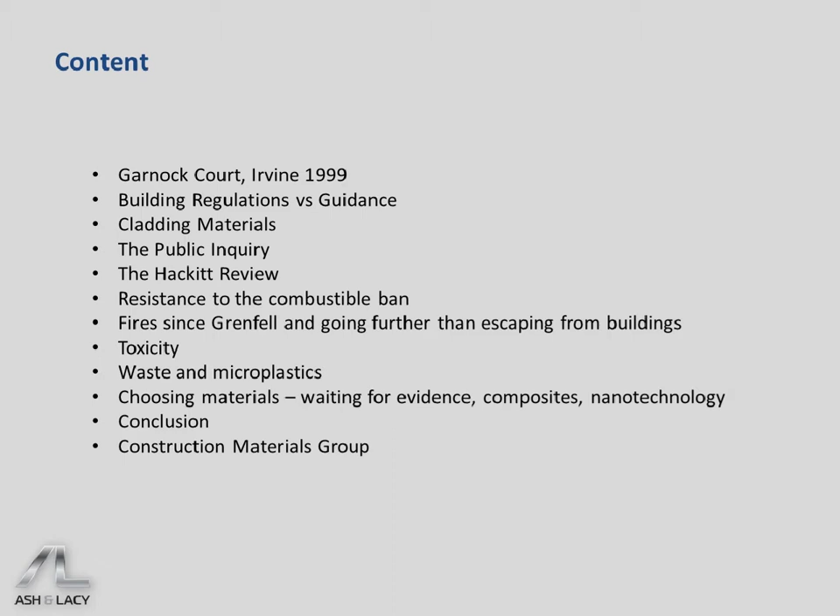Building regulations are also evidently not a quality standard that clients should believe will assure them of a building they can be proud of, nor should they be used by building professionals and engineers as a guide to the choice of an appropriate material during construction. What we're going to look at is how the construction process has been affected by developments following Grenfell Tower. And rather than look just at the combustibility of materials and fire regulations, we're going to look at other issues relating to construction materials that the regulation changes might actually impact.

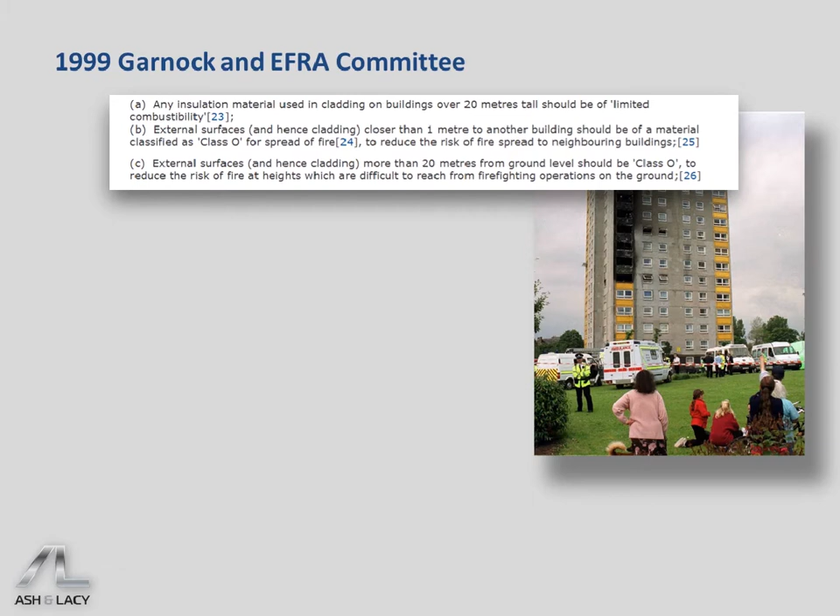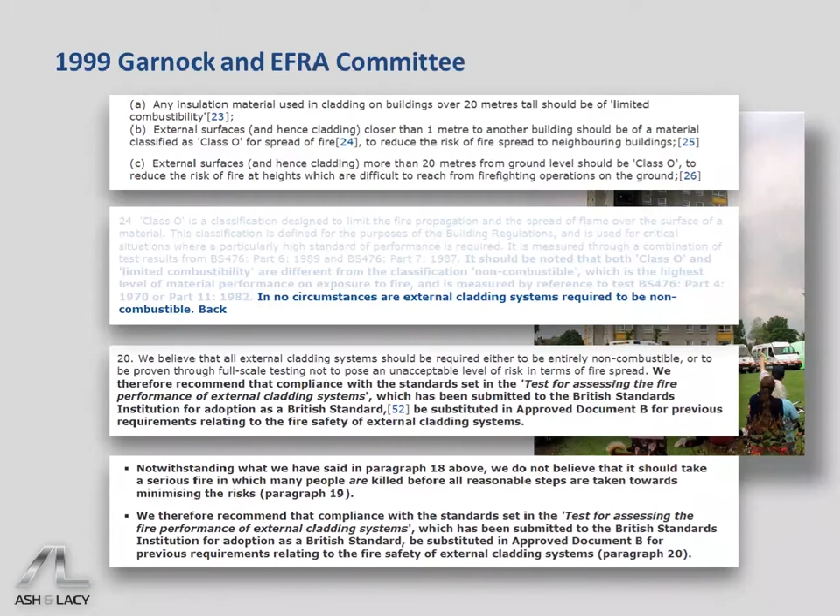20 years ago, there was a fire in a block of flats in Irvine, Scotland. The MP at the time, Brian Donohoe, recognised that this fire could have been much worse. Sadly, one person died, but had the fire happened during the night when everybody had been asleep, the death toll could have been much higher. So a committee was formed to look at the cladding on this building and the external fire spread, and it made a number of recommendations that sadly were an indication of the failures that were to follow over the next 20 years. The words that seemed to strike the most from what was said at the time were that it shouldn't take a serious fire in which many people are killed before all reasonable steps are taken towards minimising the risks.

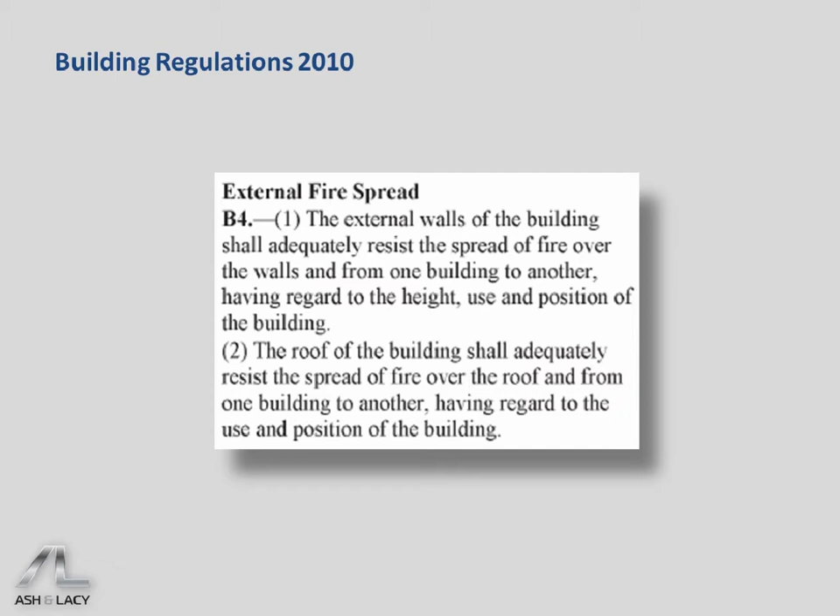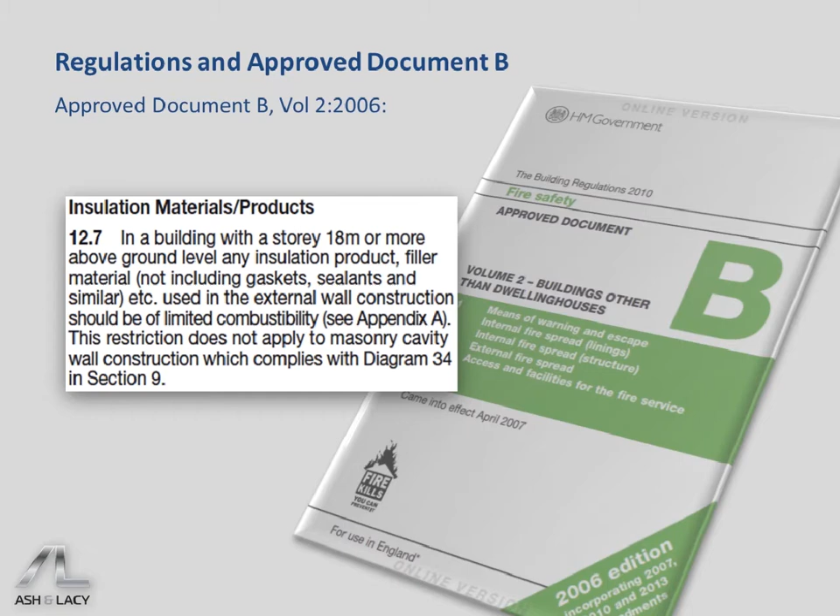It's clear to understand that building regulations themselves are actually very simple. All they dictate really is that you shouldn't have a building where the external spread of fire isn't sufficiently restricted. However, doing so is quite a difficult process. So we have a suite of approved documents, approved by the Ministry, which gives detailed guidance on how to actually achieve the restriction of external spread of fire. The particularly contentious clause in Approved Document B, which relates to fire safety, is clause 12.7, and this has been argued about much since the Grenfell tragedy. Just to recap on some of the terminology relating to cladding, the cladding system comprises several key elements.

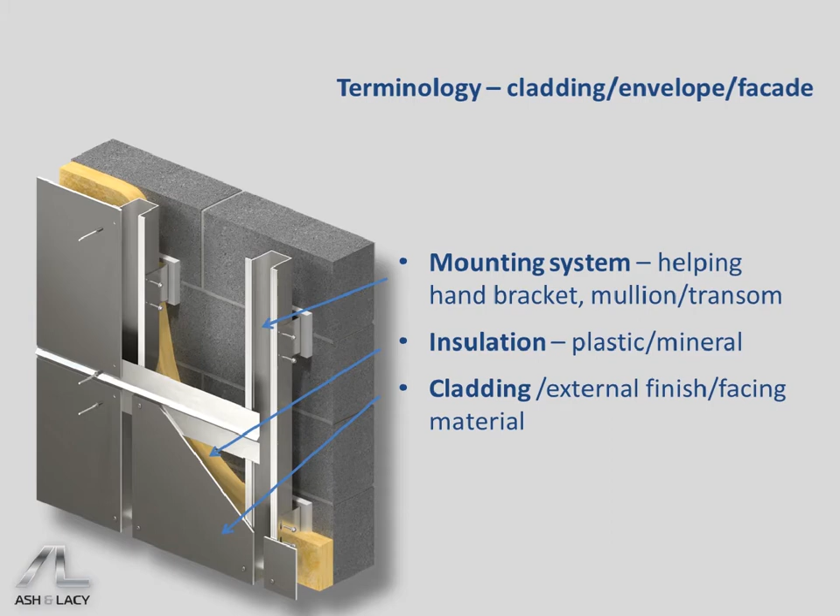We have a mounting system, usually made of aluminium brackets and extrusions, on which the cladding rests. We have the insulation which sits in the cavity. The cavity provides ventilation to prevent moisture from damaging the building. Then we have the cladding, the external surface itself, sitting on the front of the mounting system. This can be a wide variety of materials, from steel, composite materials, solid aluminium, brick slips, and so on.

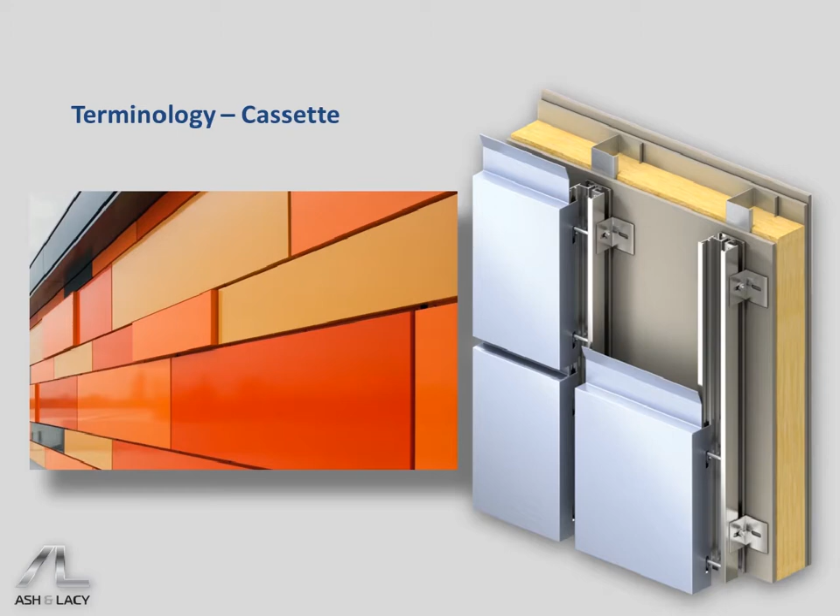This is a face-fixed system. It has a flat sheet with exposed rivets and connections and achieves this kind of finish. But most modern buildings and architects choose to use a cassette system, which achieves a wider variety of aesthetic finishes, and is largely what we see today. There's no question these are undoubtedly top-of-the-range, expensive systems. This is not a cheap way to refurbish or design a building.

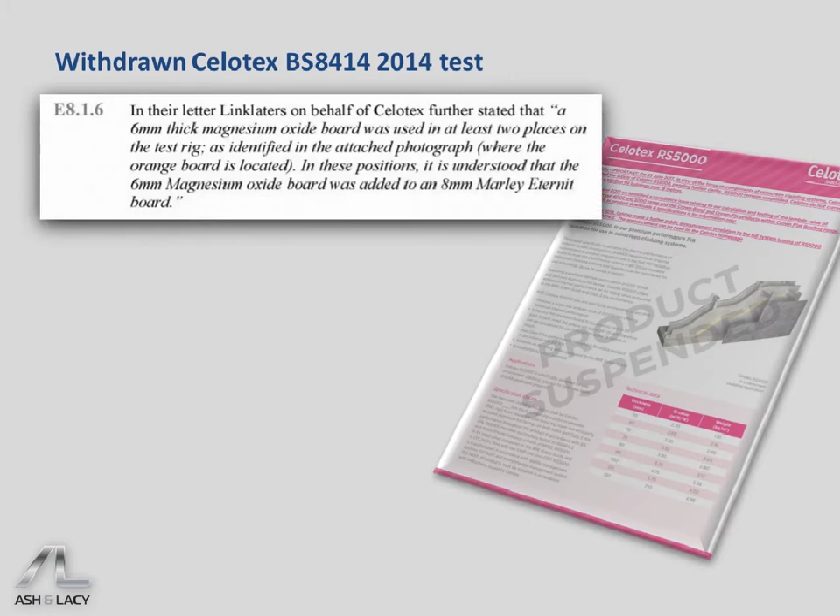After the Grenfell tragedy, Dr. Barbara Lane from Arup was appointed as the fire engineer to the inquiry. One of the key questions she was looking to answer was about the cladding itself, not the insulation, but the cladding in line with the guidance provided by central government. Her report has already highlighted a vast number of failings in the whole process that led to the refurbishment, including building control, the product certifiers, the testing process that leads to certification, and so on.

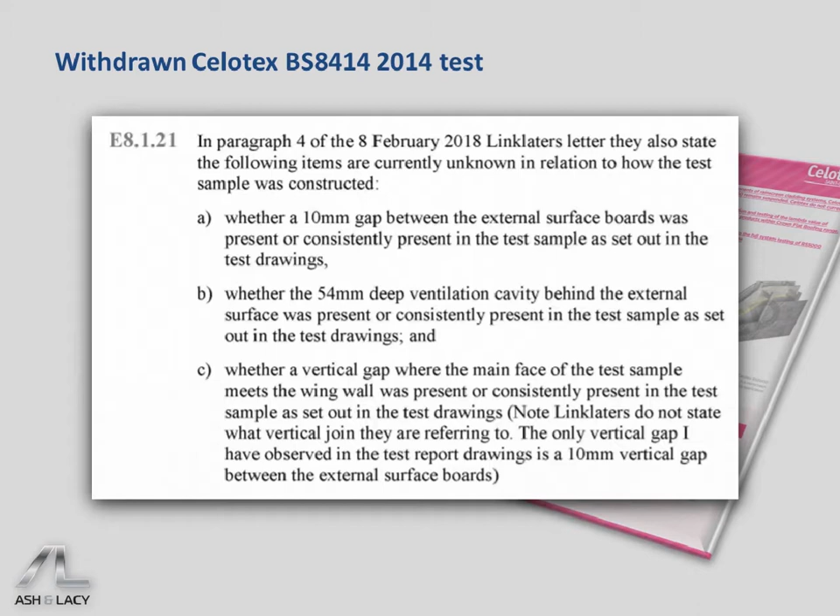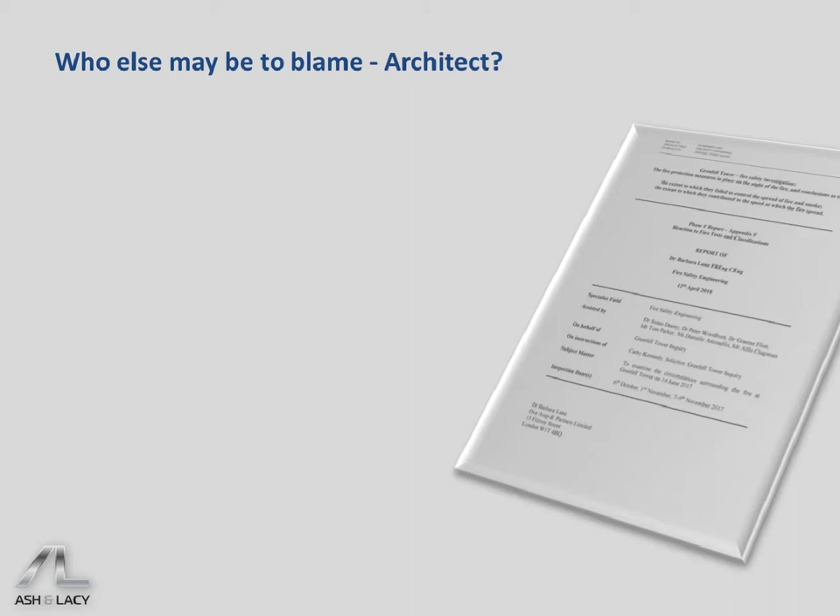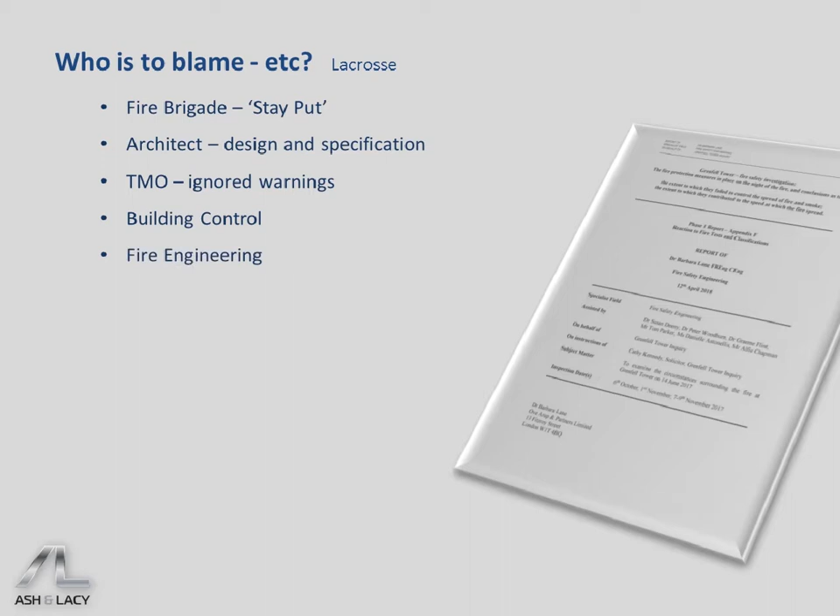Soon after the disaster, it was clear that the certification for many of the products wasn't adequate, and some were removed from the market. But the whole process isn't just limited to the cladding itself. The disaster exposed a wide range of issues with the construction industry and how it's regulated and controlled. The design itself was severely flawed, but there are also many other parties who have received a lot of attention and criticism. Every single one of these organisations involved in the refurbishment have questions to answer about the role they played.

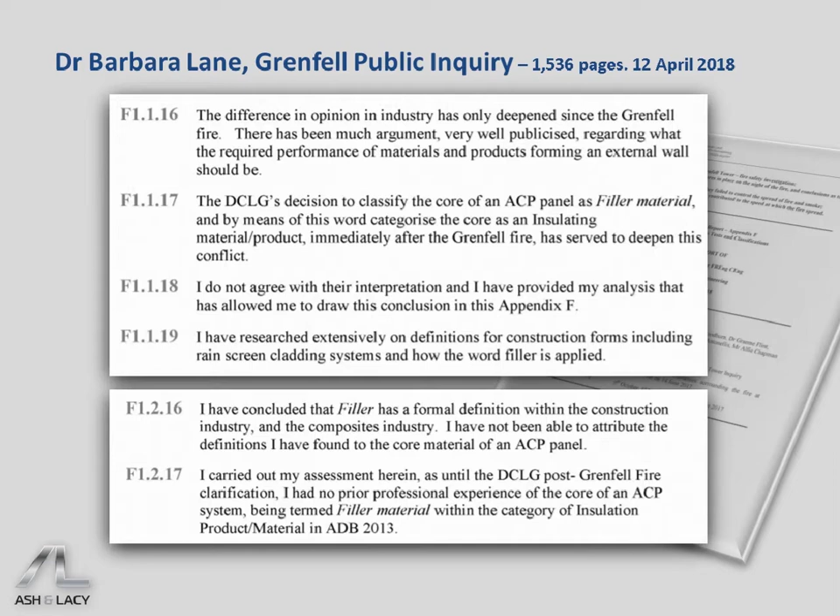Going back to one of the key items of whether the cladding was compliant or not, it's Barbara Lane's opinion that Class O ACM as used on Grenfell could have been compliant with approved document B, section 12. That is absolutely critical to understanding what went wrong in Grenfell Tower and how the regulation process could be changed to suit moving forward.

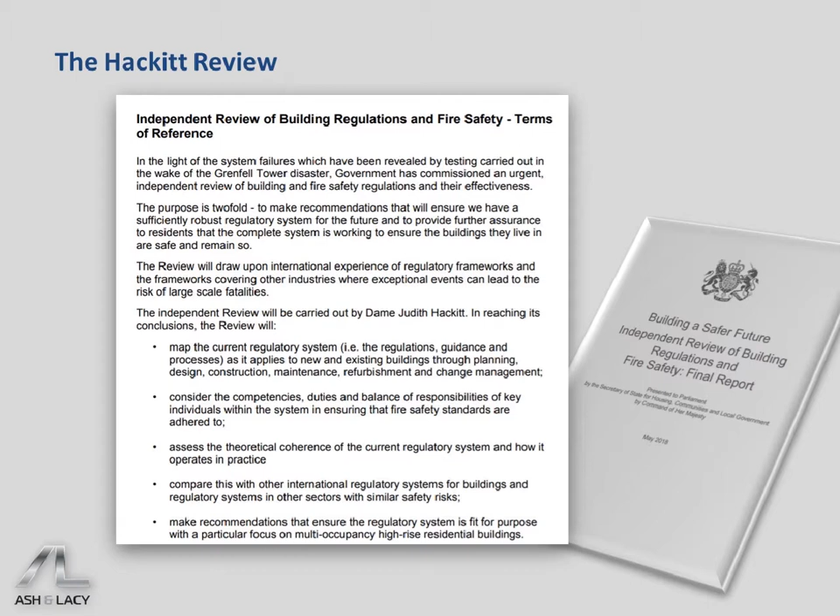She was asked to look basically at the system surrounding building regulations. It was quite apparent when her review report was released that she'd started from the premise that the cladding on Grenfell Tower was already banned by the guidance and the regulations. The regulations clearly should never have allowed a material like that on the building, but she assumed that the guidance in approved document B actually insisted the cladding should have been of limited combustibility. She had a very hard time on the day the report was released, mainly because she ignored the elephant in the room, which is that you should simply ban the types of materials that were there.

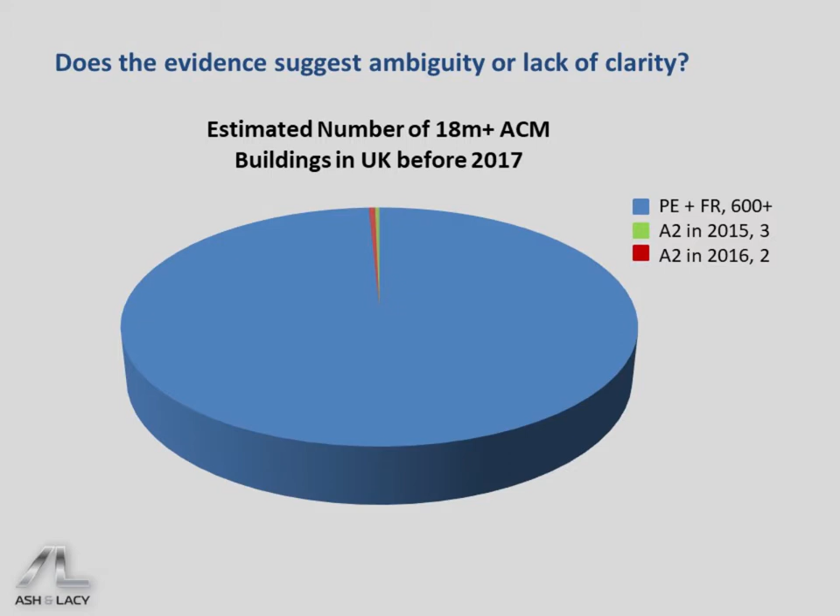If we move forward to 2015-2016, we can see that we have about 5 buildings now, so approximately 1% of buildings now had limited combustibility ACM cladding. It was very clear that the industry, all the professionals, the building control, fire engineers, specifiers, architects and designers, all understood approved document B to mean that you needed Class O or Class B cladding on a building over 18 metres. Among the highlights of the Hackitt Review were some good proposals.

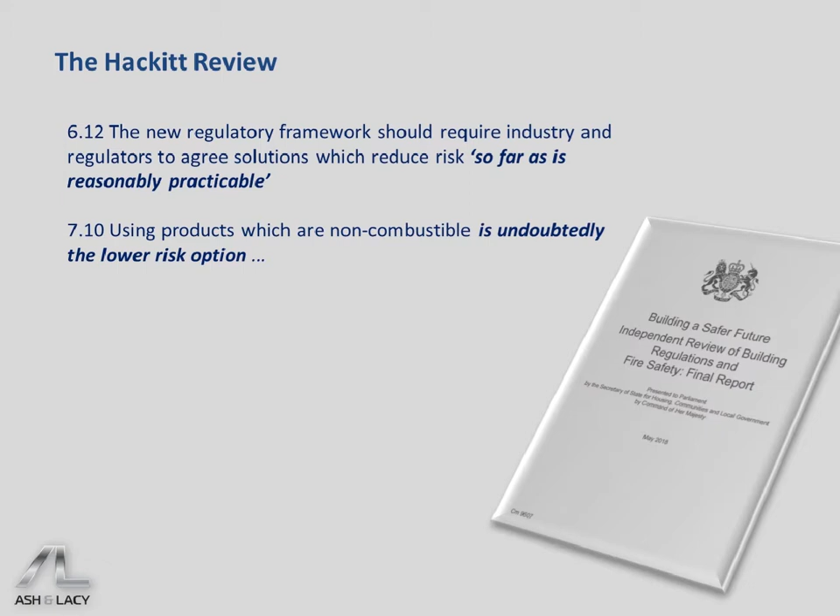The regulatory framework should require industry and regulators to agree solutions so far as is reasonably practicable. Now, the part of that clause which worries me is 'industry and regulators to agree solutions', and we'll come back to that. She also said that using products which are non-combustible is undoubtedly the lower risk option. However, what she failed to do was combine 6.12 and 7.10 to come to the conclusion that actually one of her recommendations should be to remove combustible materials.

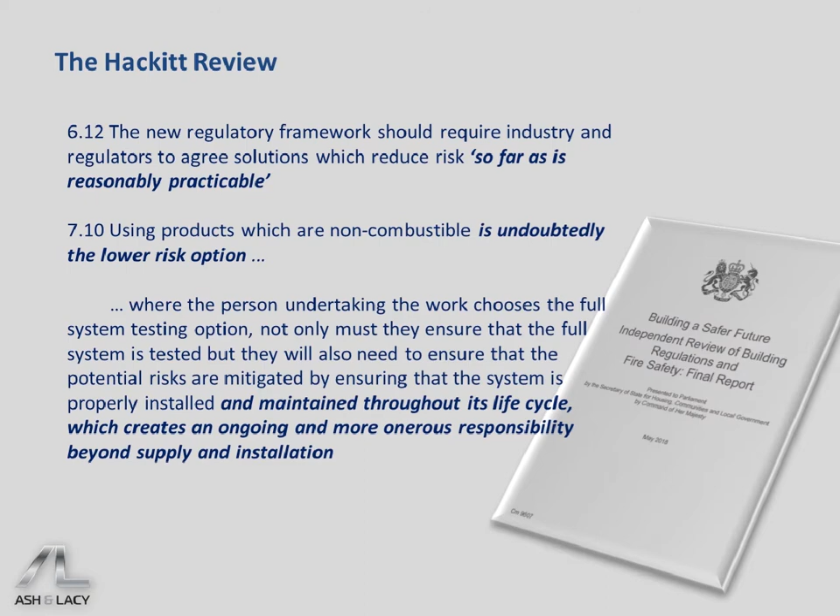She also made the valid point that if you're specifying combustible materials on the basis of their tested performance, the obligations on the building owner or duty holder are quite onerous, and that you have to maintain the building to the standard of the test it went through for its entire life.

So Dame Judith now travels the world talking about her review, and she underlines the fact that she was only asked to review the system itself. Who was going to look at the regulations? We just don't know. So many of the problems in terms of implementing a combustible ban, there have been a number of reasons put forward.

As you've heard Dominic Raab say, we don't want just a tick box exercise which gives the false impression that we've solved this problem just by banning combustible materials. But there have been many arguments that have led to procrastination in getting an effective combustible ban implemented.

One of the messages we repeatedly hear is that we should leave it to building science to determine what materials are used in construction. However, the people at the top of the fire engineering field quite readily point out that it's very difficult to predict how a building is going to burn given the material properties within a system.

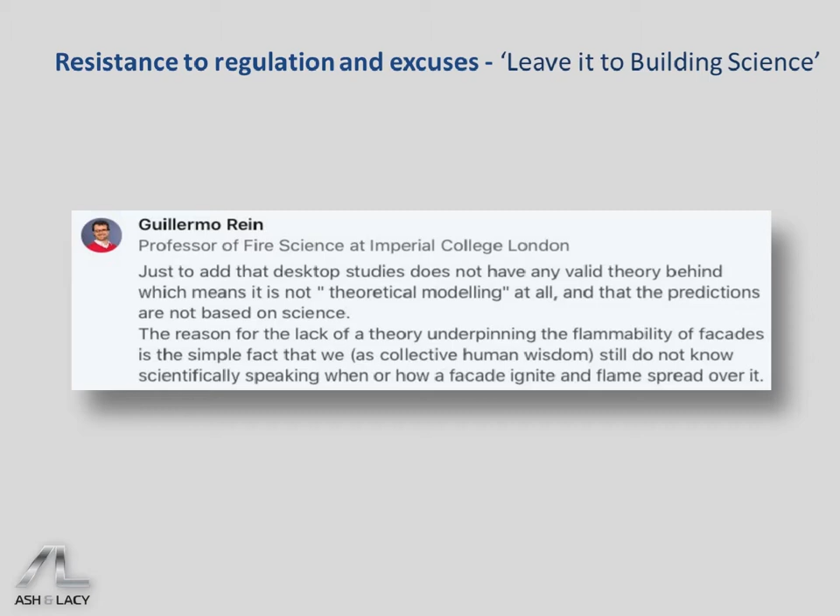The analogy I use is that predicting how a system is going to perform based on the material properties is like predicting what a musical instrument is going to sound like based on the materials that you've constructed it out of. Another argument we hear a lot is that we should sit back and look at industries that do actually get it right.

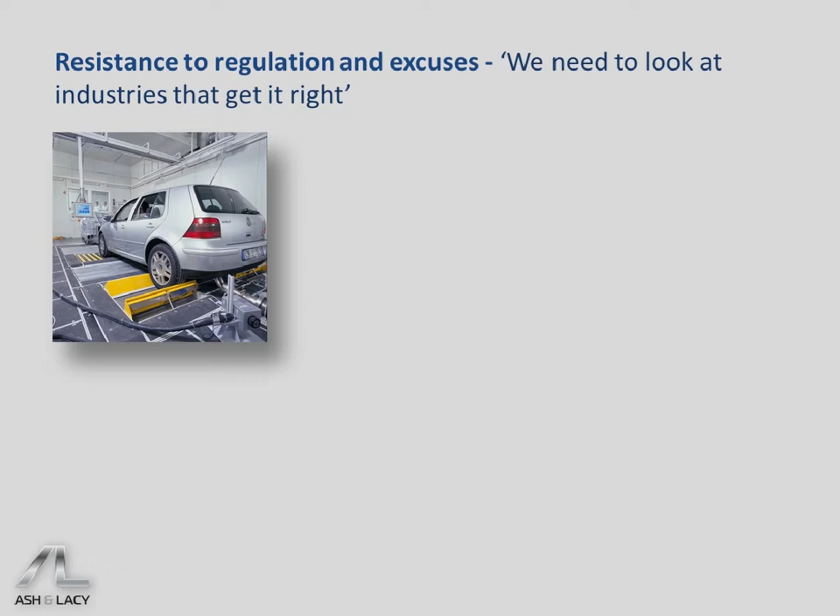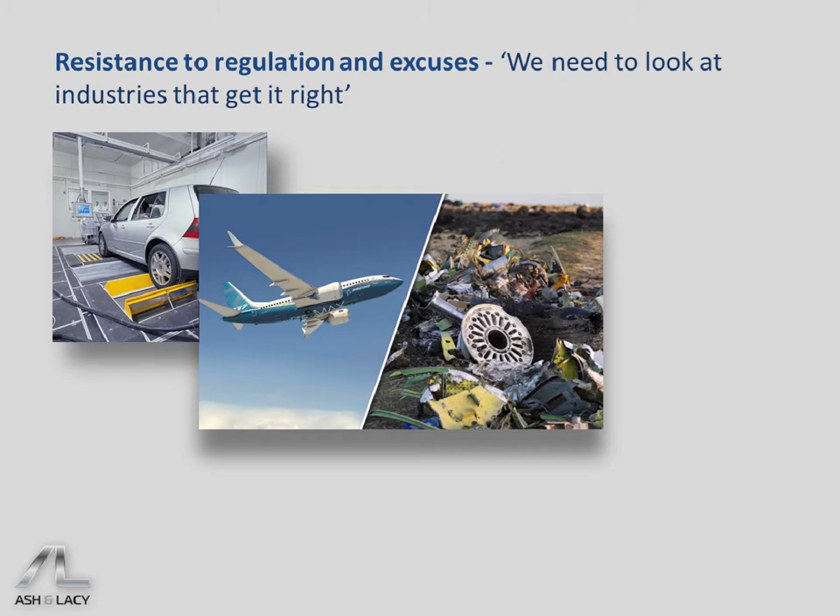I can use the same image, however, in terms of innovation, to show that the automotive industry is also subject to corruption, and the diesel emission scandal is evidence of that. The aerospace industry also has its own problems, and the more information that emerges about the Boeing 737 MAX 8 problems, the more you see regulatory problems there as well.

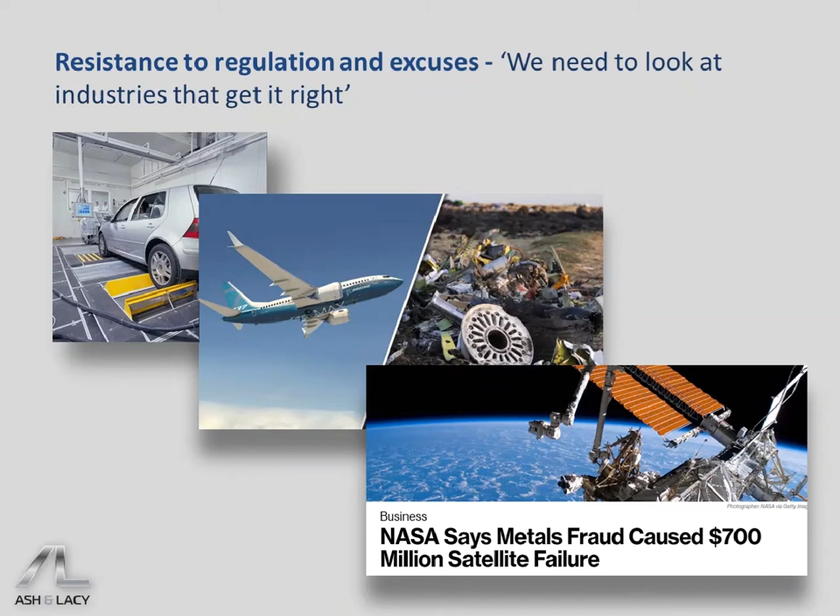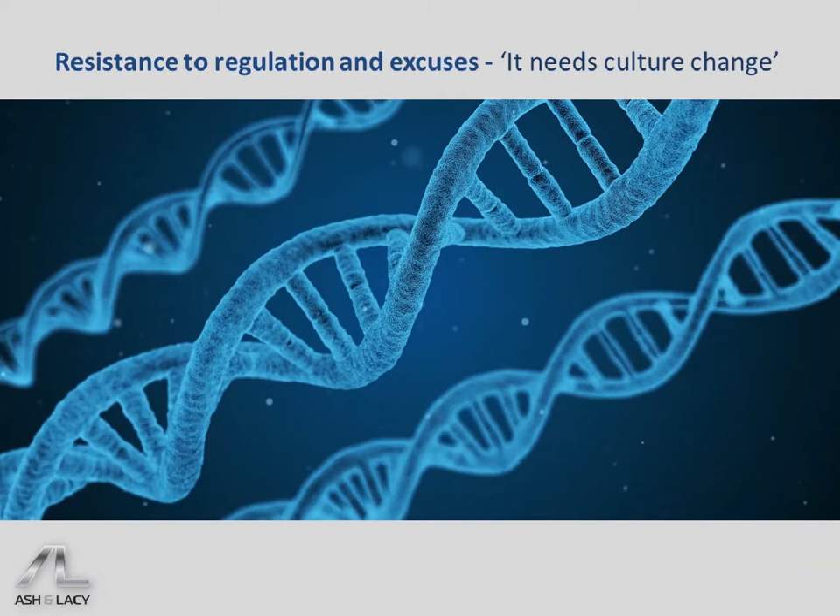Even NASA, in putting satellites into space, has problems with product certification and testing. The common theme throughout this, to me, is a lack of independent regulatory control that is totally immune from the pressures of commercial organizations. And the final one is that everything we do needs culture change and an improvement in competency. Well, those are vacuous words that you could pretty much apply to any problem around the planet today.

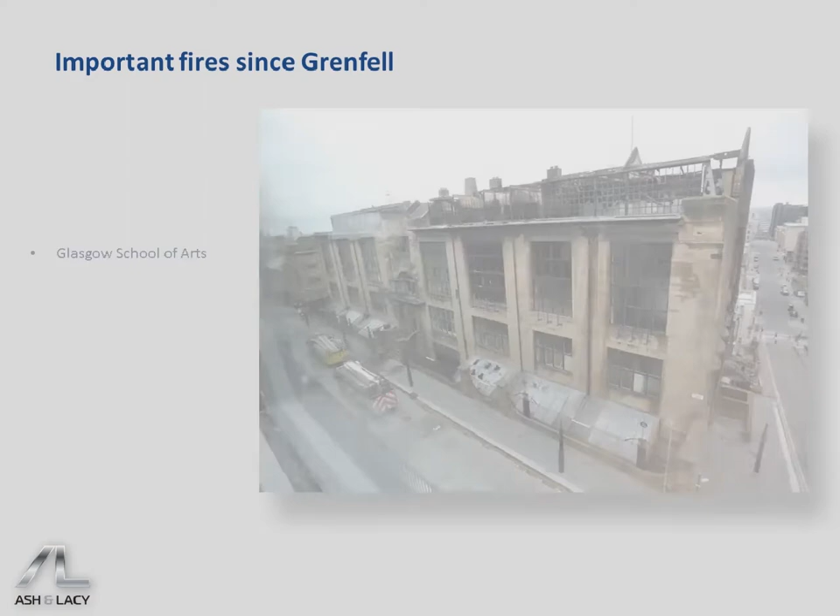What we've also learned is that building regulations, and fire regulations in particular, only look to protect life. They do not look to protect assets. But we've had some significant fires. We've lost the Glasgow School of Arts. We've lost a big part of Notre Dame. Many people lost their livelihoods and possessions in a self-storage fire in Croydon on New Year's Eve.

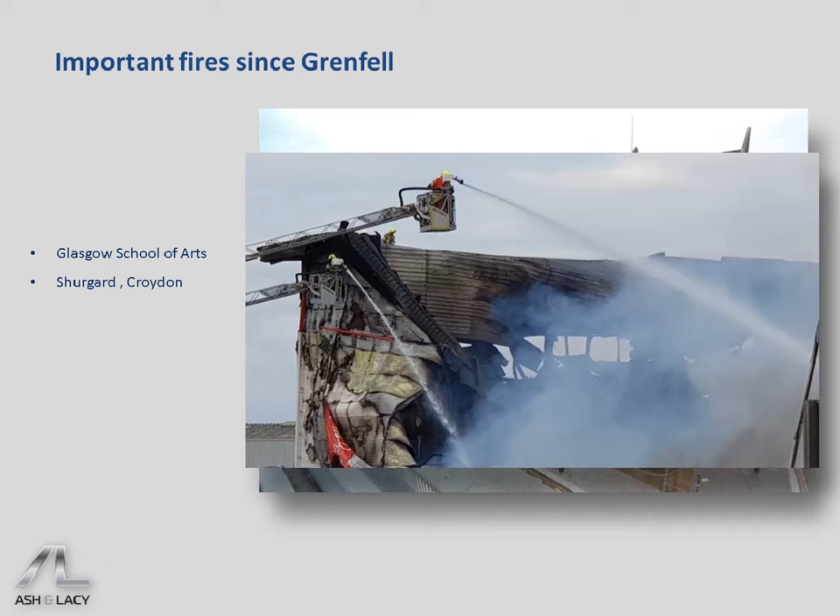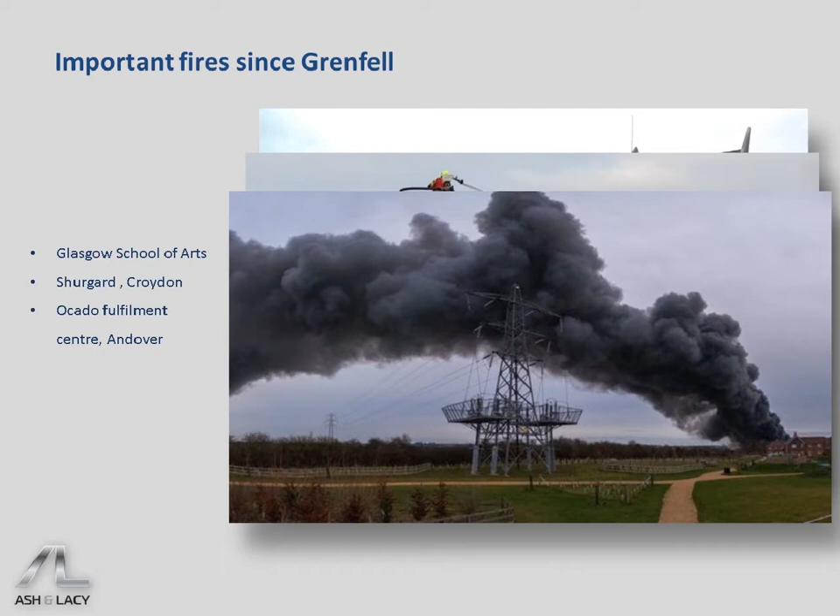We've had a spectacular fire at a building that won awards for its fire safety, at the Ocado Fulfillment Centre, which caused massive disruption to businesses, and local houses were evacuated and so on. So we have to question whether fire regulation should go far beyond actually just being able to get out of a building alive. Toxicity is an issue that is very contentious.

Before Grenfell, there was a report commissioned by the EU that the BRE carried out, looking at whether we should regulate the toxicity of building materials. However, the report itself highlights some of the inadequacies in our regulatory process and the lack of leadership that we have.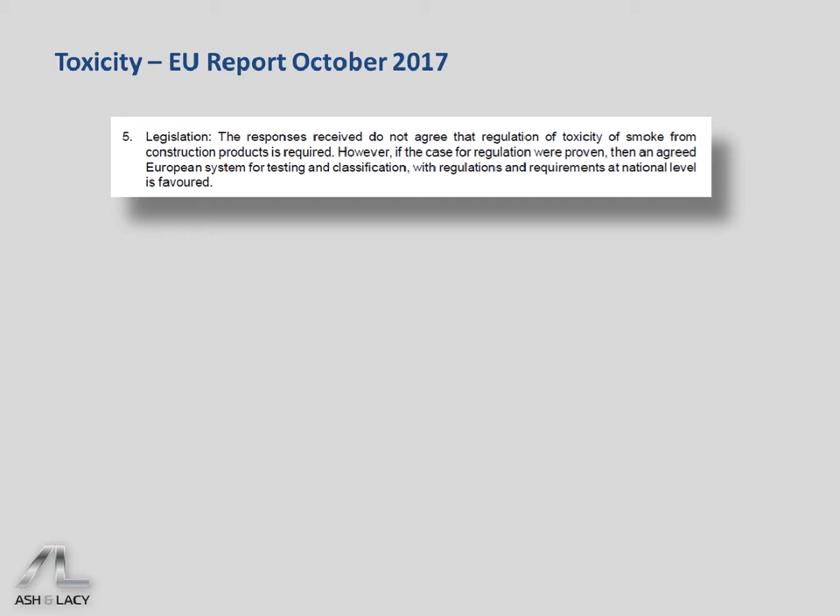Basically, the report showed that the responses didn't agree that toxicity should be regulated. That's not surprising given that many of the responses came from plastics manufacturers and their lobbying organisations. One of the quotes from the report gave a reason to not introduce toxicity regulation, in that it could actually remove some products from the market.

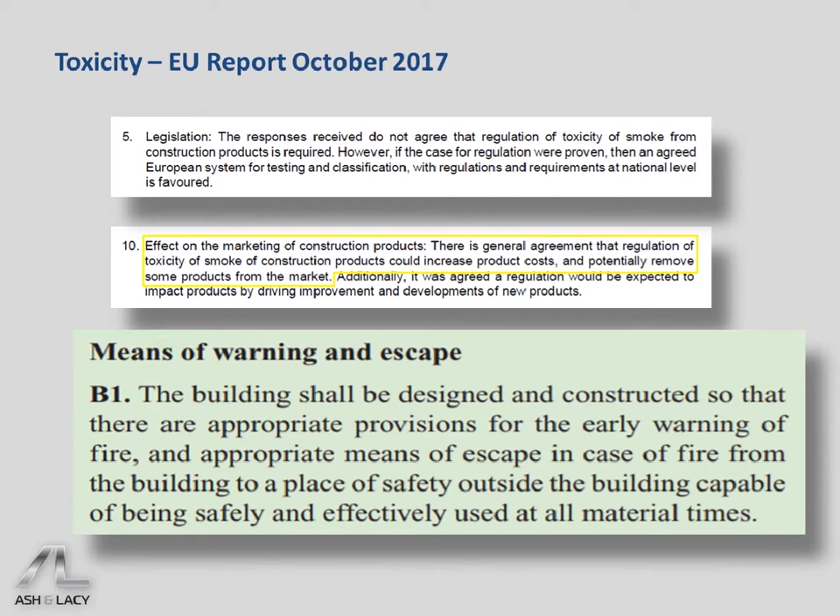However, the report did actually state that in areas where toxic smoke could lead to compromising of escape routes, this should be looked at. And it's possible to argue that building regulations do regulate toxicity if you interpret the means of escape requirements slightly differently. Means of escape requirements being clear and usable at all times is usually interpreted as being clear from physical obstacles. But as you'll see from the next video, taken from the night of Grenfell Tower, smoke itself could be construed as preventing the use of an escape route.

We do have increasing evidence, and there is a lot of history that shows that governments, in the face of credible evidence, do change regulations. However, this can take a long time to manifest itself.

There is more evidence emerging, particularly from firefighters, that toxicity can have very damaging effects on your long-term health. Some of this data is accumulated over many, many years.

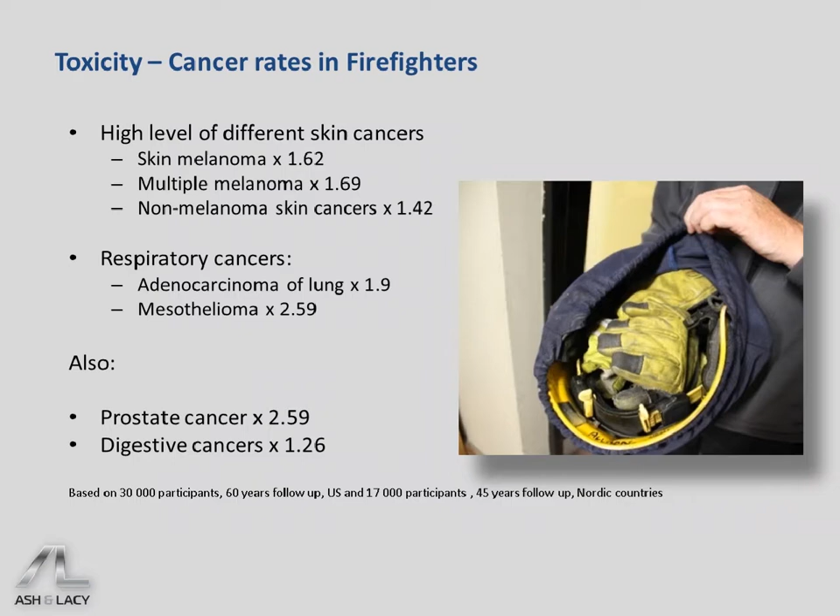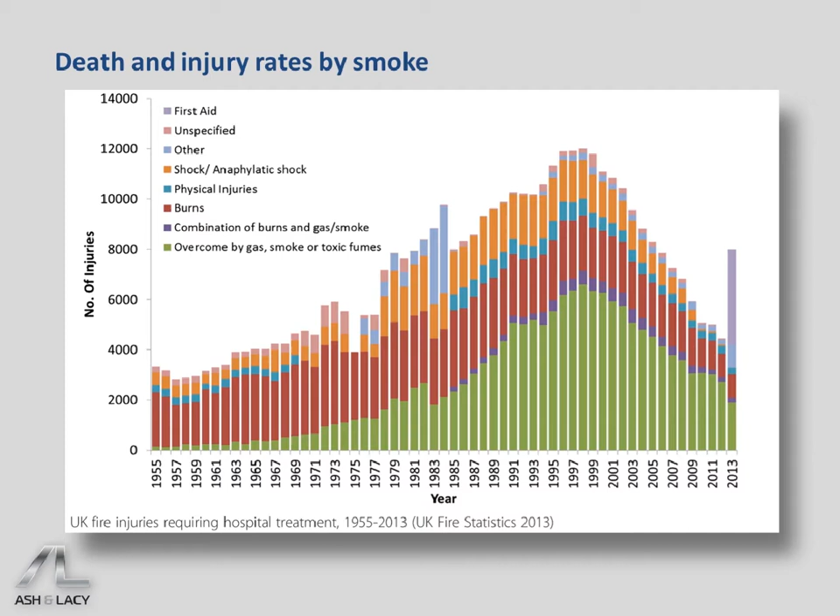What we've seen, though, is the nature of toxicity seems to be changing. If you look at this graph, up until the 1960s and 1970s, the number of people that died from the effects of fire was largely due to burns. But during the 70s and 80s, the proportion of people that died actually from the effects of gas and smoke rises considerably and plateaus into the late 90s. So the nature of the materials that people are dying from the burning of has changed over the last 50, 60 years, and cladding systems represent a problem in themselves.

Combustible materials burn differently, whether they're in ventilated or unventilated conditions. On the left-hand column, the flame retardants that are added are unbonded, so it doesn't really matter how the material burns. You can see from the chemical symbols that these gases, when combined with moisture, form acids, which is why we often hear of people reporting irritants in their eyes when hydrogen chloride mixes with the water on your lungs and in your eyes, it's going to sting.

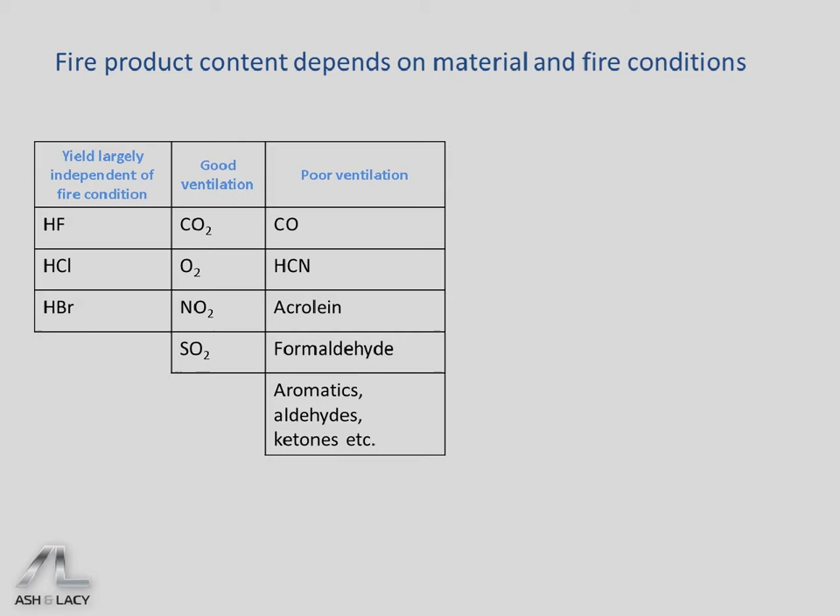In the right-hand column, with a poorly ventilated fire, as you would find in a rain screen situation, incomplete combustion leads to complex molecules which have potentially damaging long-term health effects. Carbon monoxide and hydrogen cyanide are easily got rid of by the body. However, they are incapacitating in the early stages of fire.

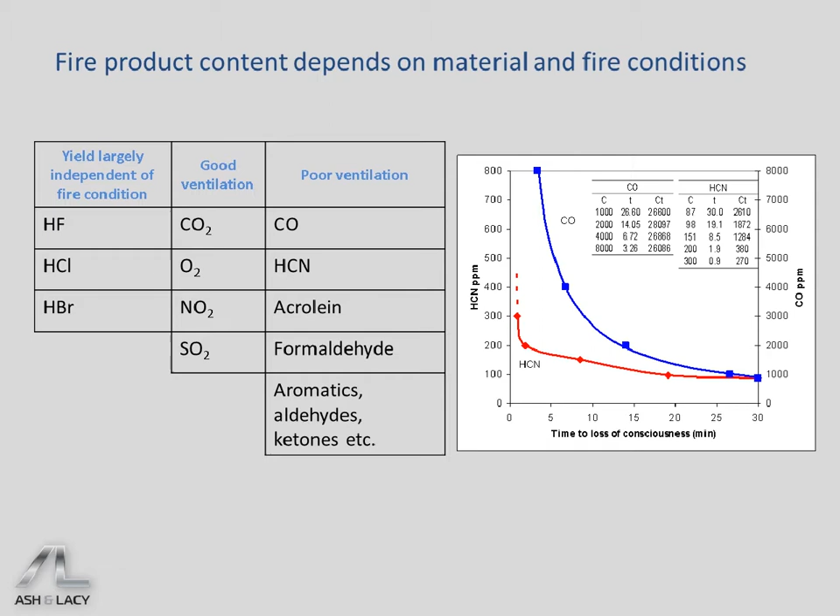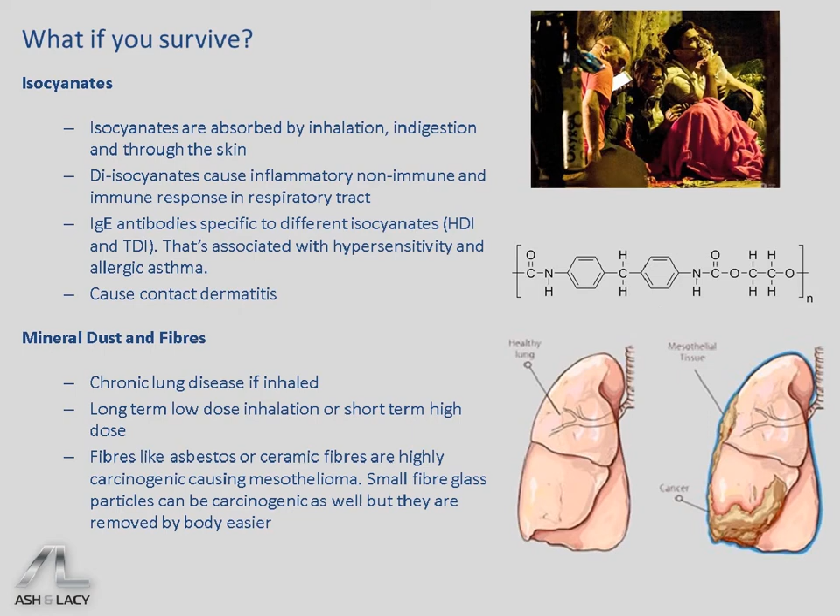However, if you've survived the fire, your problems might not be over if you've been exposed to a significant level of smoke inhalation. More and more evidence is showing us that long-term health problems can affect the people who've survived fires such as the Grenfell Tower, and this evidence is likely to increase over time.

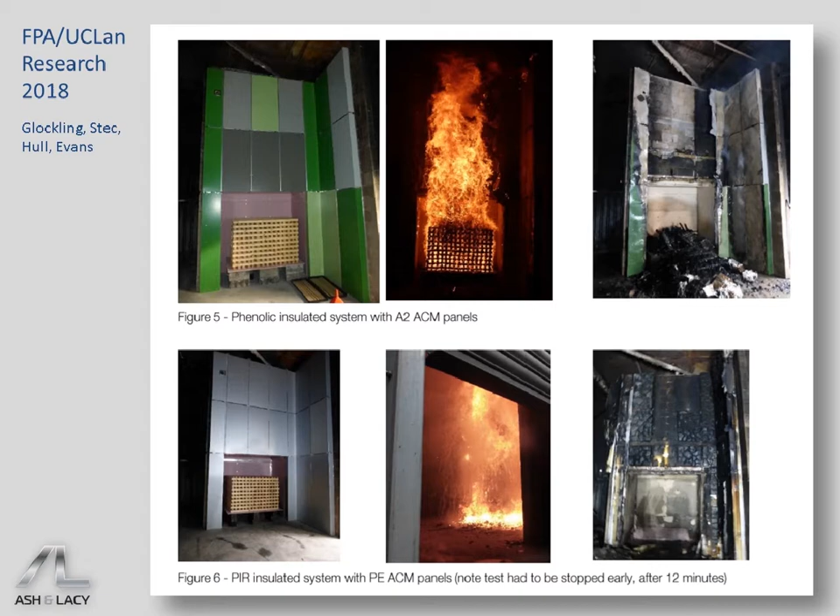A number of combinations of materials, non-combustible cladding, combustible and non-combustible insulation, were analysed, and part of the test included analysing the gases that went into the vent even before the fire actually reached the vent itself.

Interpreting these results and extrapolating them as if these gases had filled a 50-cubic-metre room, such as a kitchen or bathroom that the people in the flat above were protecting themselves in, shows that even with non-combustible cladding, the combustible insulation systems had lethal doses within half an hour, even regardless of the fire having spread to the flat above.

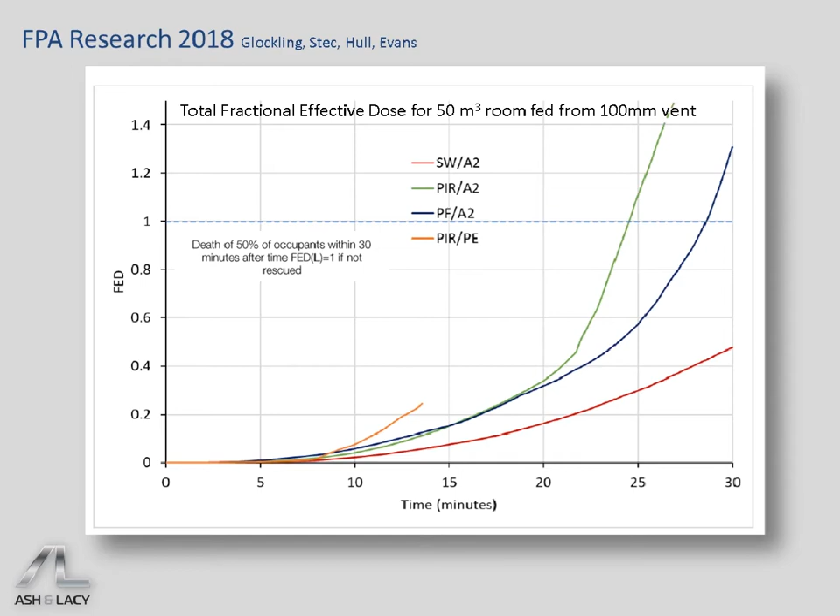This calls into question two key things. One is the stay put policy, and the other is whether toxicity should also be added to the BS 8414 test, which looks at the fire safety performance of systems based solely on their external fire spread.

Looking further afield than just fire protection, the combustible ban might have implications that weren't necessarily intended, hopefully beneficial. We're bombarded today with information about plastic pollution, bottles floating in the ocean, and microplastics being found everywhere. It's not just pollution that we see that is necessarily the problem.

Much of the combustible material being stripped off buildings that are considered dangerous today in the building safety program will be headed to landfill. There are no viable recycling schemes for thermoset plastics at the moment, and much of this material is useless in any other form.

We're also seeing that around the Grenfell fire, many of the flats, the curtains, the carpets and so on are contaminated with the byproducts of the fire. The polyurethane foam market in 2018 was estimated at $50 billion, so these are very large numbers and it is growing at a considerable rate.

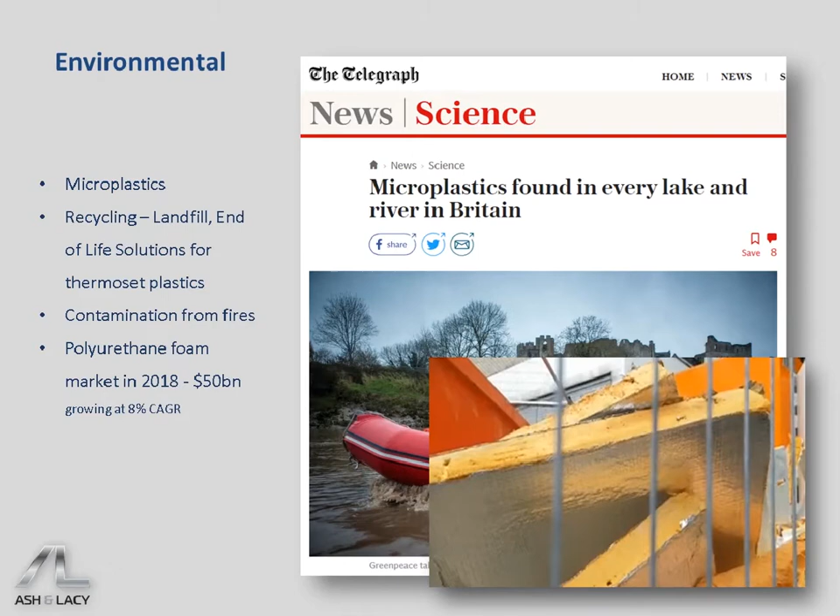The video you're about to see shows nothing to do with the combustibility of these products. Here we have 100 millimeters of phenolic foam insulation, and all we're going to do is cut it.

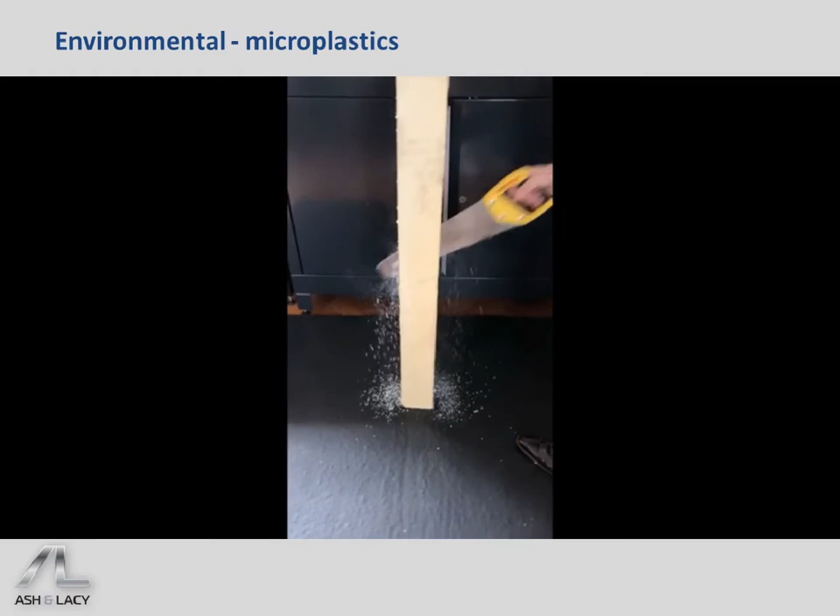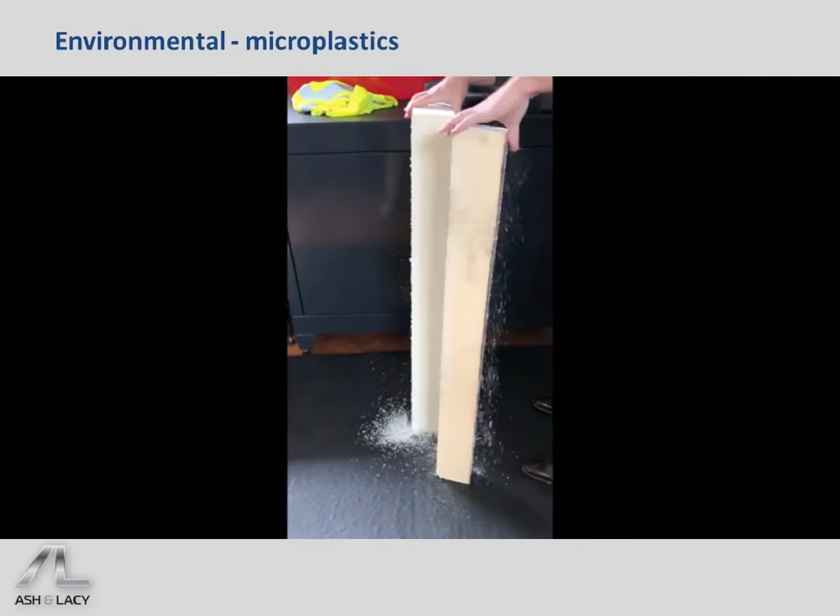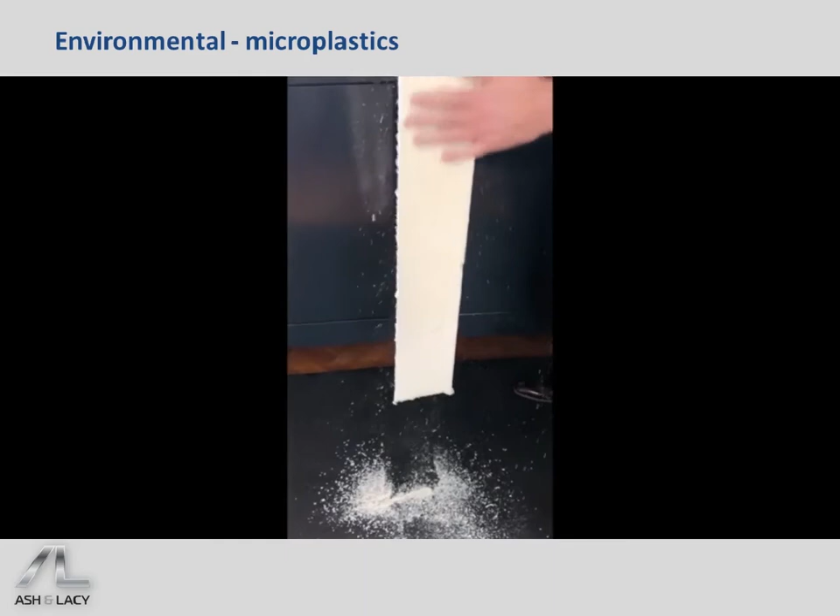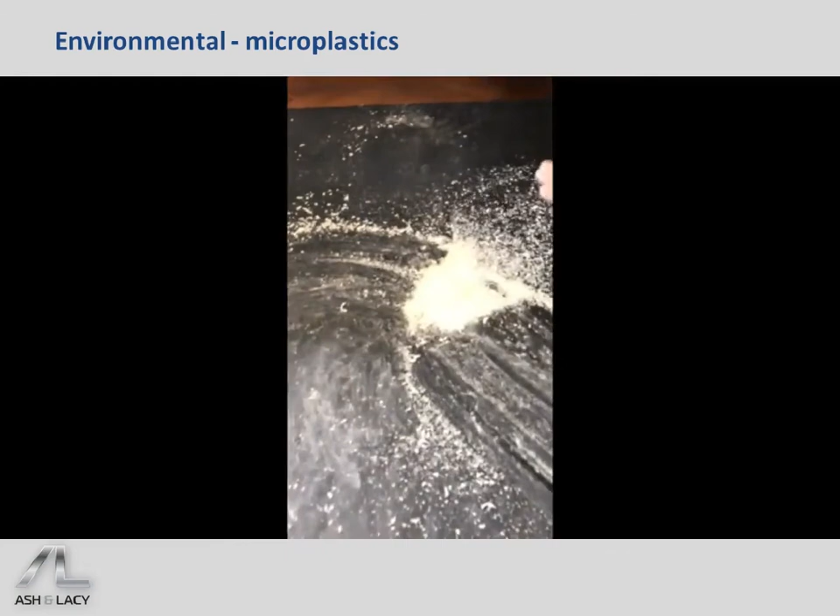As you can see, it leaves quite a rough finish to the product, and all this is basically going to come off at some point. Quite smelly too. If you zoom in, what you've got from just 1 metre is this.

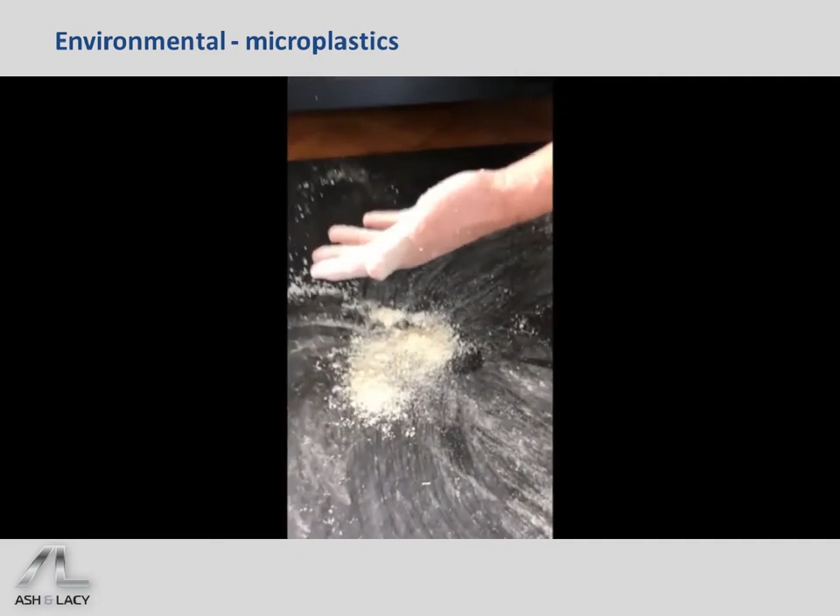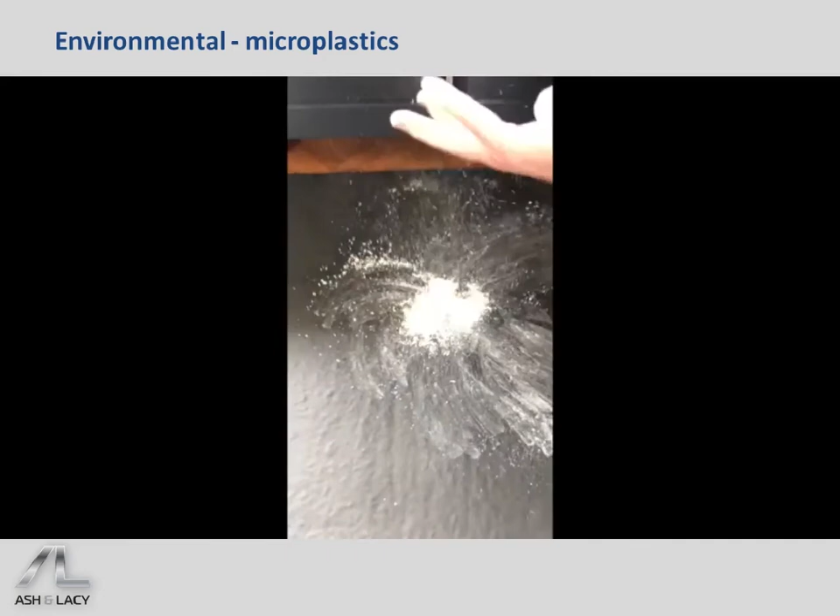You can see the dust flying around. You've got basically a powdery mix of polyurethane based thermoset plastic with some kind of flame retardant mixed in with it. Now obviously on a building site, what's going to happen to that is it's just going to fly away out into the air, into the water streams, into your fish, into your stomachs, into your areas of natural beauty, and so on.

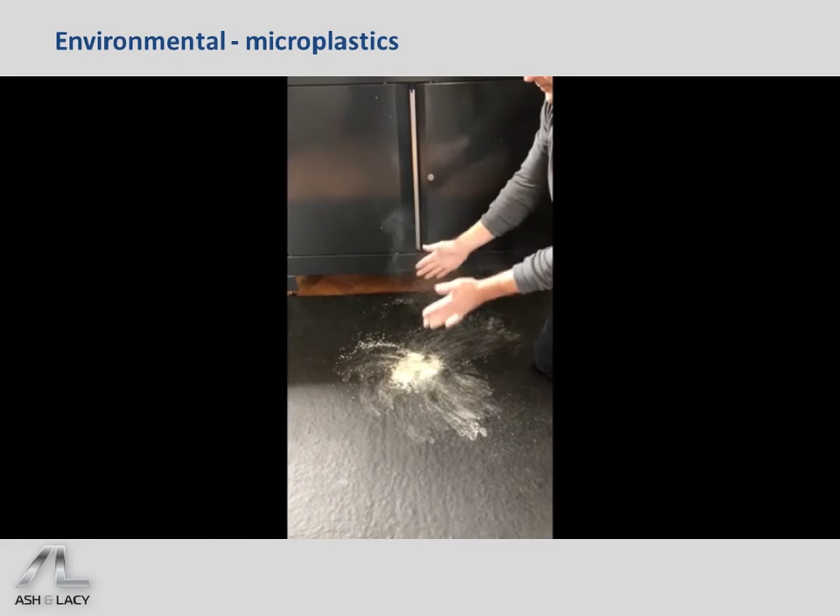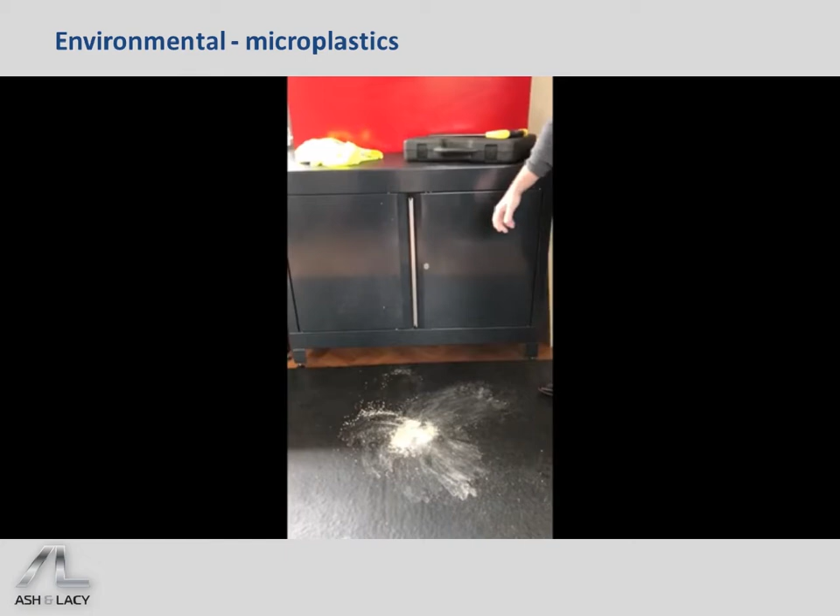There you go. A rough estimation is that 3 road tankers full of microplastic from cutting of thermoset insulation are being dumped into our environment every single day. A material that was heralded as part of the solution to the global carbon dioxide problem may actually be creating other problems itself, very similar to the diesel situation we have, where the particulate emissions seem to have outweighed the benefits from carbon dioxide reduction.

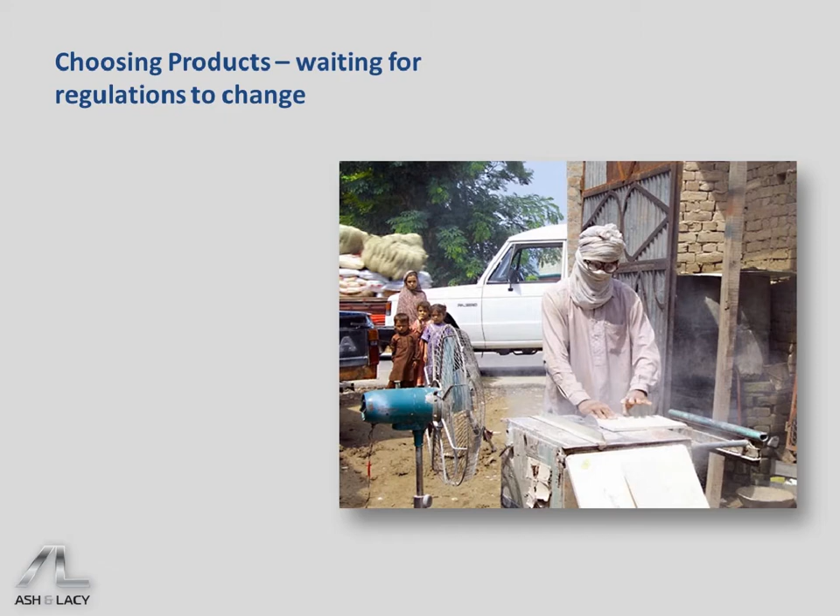So, do we wait for evidence to develop, or should we start acting now? History has many lessons for us in this respect.

Asbestos controls were first introduced in the UK for processing in the 1930s, with breathing apparatus recommended. However, it was 75 years before asbestos was banned in the EU, and it remains widely used around the world and is in fact growing very rapidly, including in America.

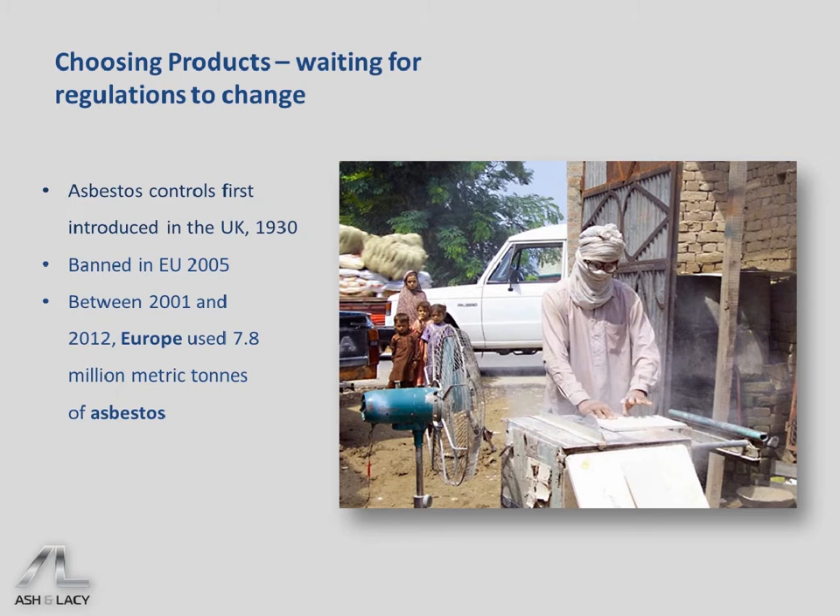Even between 2001 and 2012, nearly 8 million metric tons of asbestos was used in Europe alone. So that gives you an idea of the amount of asbestos that was used in that 75 years between the first controls on asbestos and it actually being banned in Europe.

Asbestos is also an interesting material in terms of being wary of new materials that might emerge as a result of the combustible ban. A naturally occurring mineral, it has a microfiber structure which presents enormous long-term health problems, but it's also an indication of what could go wrong with other materials as well.

So here are a few examples of things we should be careful of. Materials that are entangled together present unexpected problems with recycling. I'm not just talking about composite materials, but even aluminium window frames, which have EPDM seals and so on, are very difficult to recycle, and many recycling centres will reject them.

Products that have complex chemistries also leave huge questions in terms of their long-term end-of-life recyclability, and also the scale of the structures within materials and whether they will present a problem.

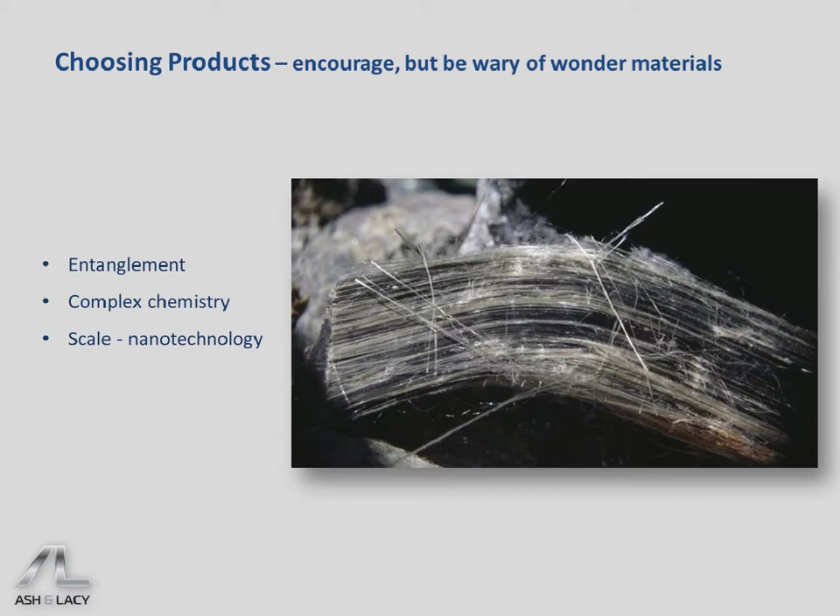To understand this a little better, we're going to show a video of an immune cell trying to attack an asbestos body entering through the lungs.

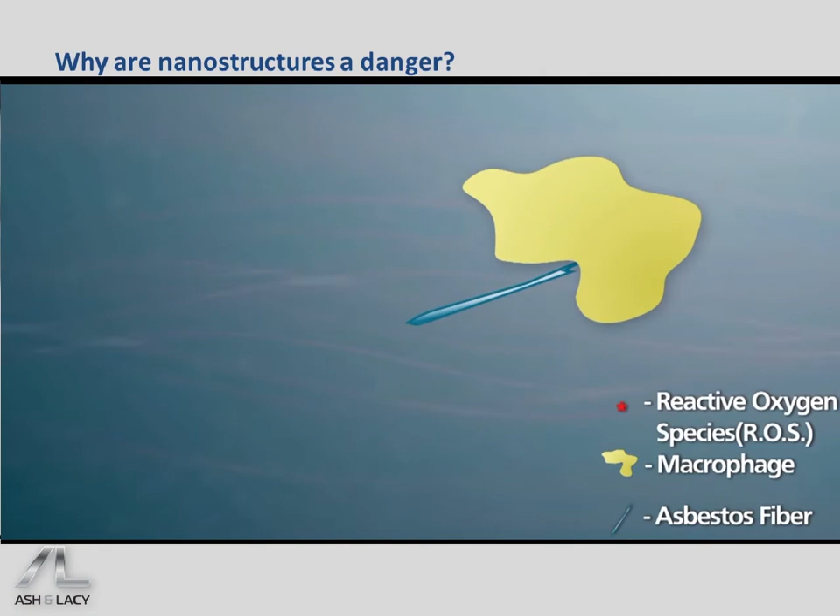After the asbestos fibers lodge in human tissue, the immune system sends a special cell known as a macrophage that attempts to wrap around and remove the fiber. But unfortunately, not all macrophages are successful in removing the fibers, which causes the fibers to build up over time. The chemical reactions that occur during this process result in compounds like reactive oxygen species, which damage DNA and lead to scar tissue or fluid buildup.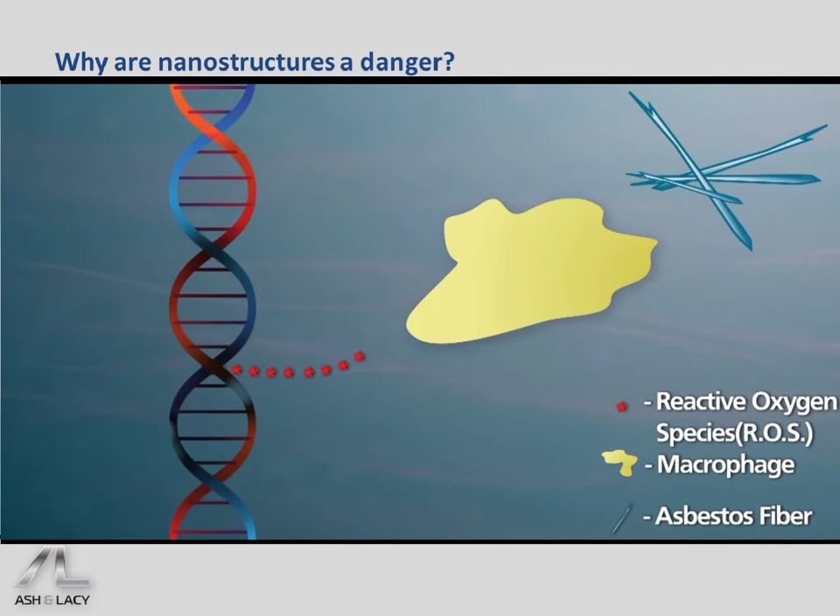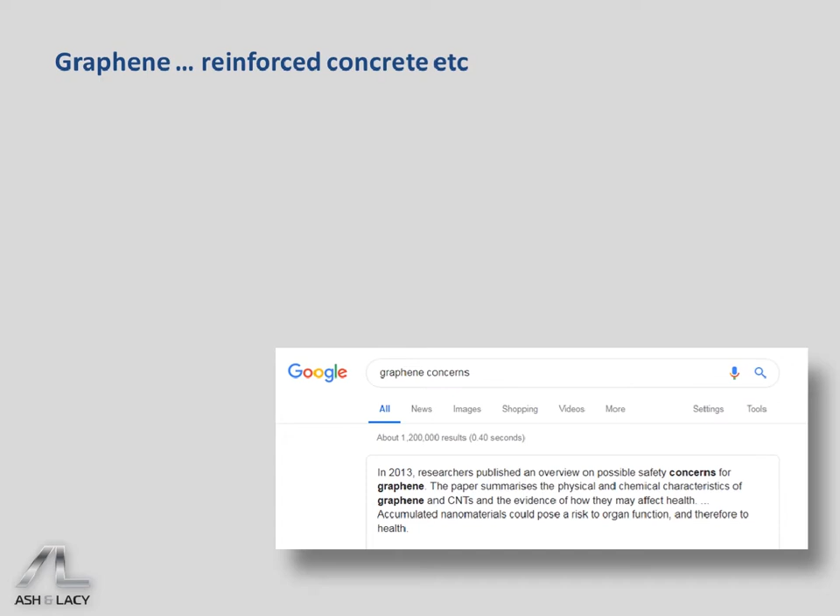Other materials perhaps that we might want to be wary of, that are unproven at the moment: anything to do with graphene, in my view, is a potential danger and has the same sort of scale that a macrophage would have difficulty in dealing with.

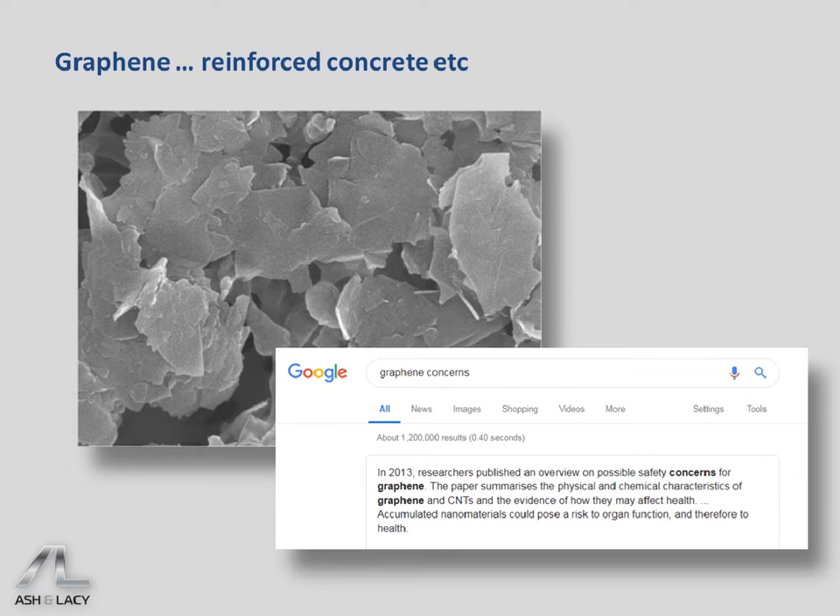This image shows graphene platelets, so they lack the large networked structure that the human body tends to find easier to get rid of. Platelets themselves are a similar size to an asbestos fiber. You don't have to look very far on the internet to find a number of papers highlighting the potential concerns of graphene.

Also aerogels - I'm very optimistic about aerogels being a great material for the future. However, they also possess a structure with similar dimensions, which could potentially cause a problem for the human body.

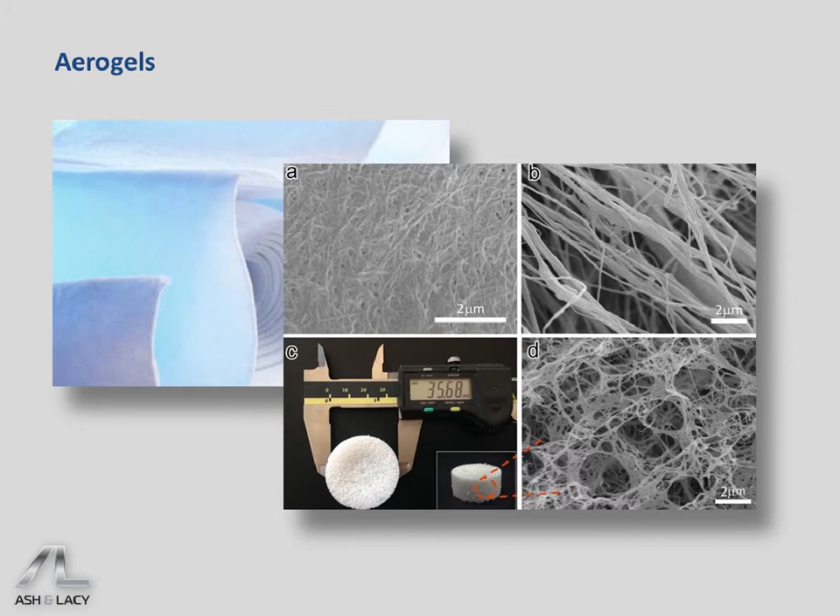So, in conclusion, the message I have to the engineering profession is to take up the challenge of specifying materials in a responsible way and not leave it to legislation.

Fundamentally, we should all stick to what we understand. It's a great message in life in general. Warren Buffett used it as his fundamental principle for investment, and I also think it applies to construction materials.

The industry has got an awful lot of work to do to prove that materials are safe, rather than use them until we have proved that they're actually unsafe.

We would encourage clients to understand the limitations of what regulations are intended to achieve and understand what they are trying to achieve with their buildings, and go beyond what the statutory guidance requires.

Everybody should play a part in driving change in regulatory control. Regulations are absolutely imperative for ensuring that the entire industry sticks to best practice and people don't cut corners.

Read the certificates. This is an important message which has become all too apparent in the last couple of years—the actual scope and application of materials. It's very crucial to read the limitations in the certificates and, if necessary,

interrogate the test certificates and classifications of the materials as well. Also, spread the message, lead by example. In this internet age of social media and so on, it's possible that the public can actually drive regulatory change to end up with regulations which serve them and not the needs of large corporations.